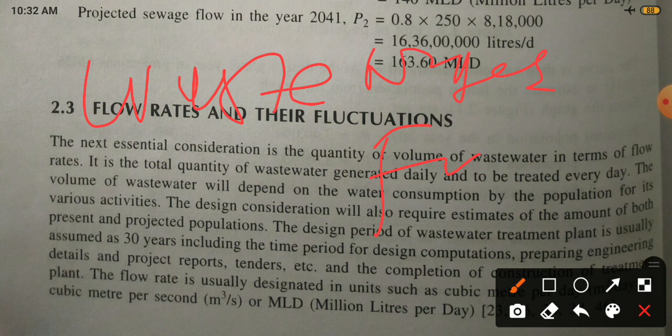Now we start the flow rate and fluctuation part. The next essential consideration is the quantity or volume of waste water in terms of flow.

Some flow rate, it is the total quantity of waste water generated daily and to be treated every day. What is said is that the essential consideration is simply the quantity or volume. This is the main word - the quantity of volume of waste water in terms of flow, some flow rate.

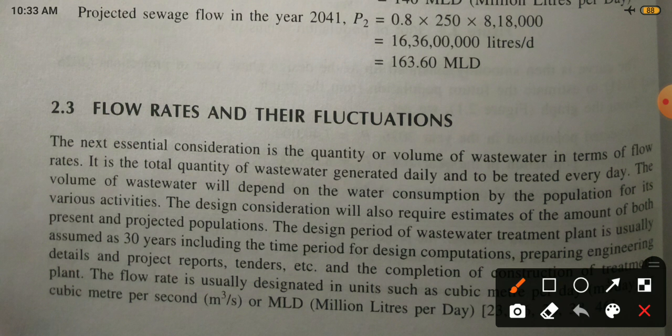That is, simply there are three types of flow: laminar flow, turbulent flow, and transition flow. Laminar flow is a straight line, turbulent flow is a wave line, and transition flow is a dotted line. These are the types of flow.

Now, the volume of waste water will depend on the water consumption by the population for its various activities. And the design consideration will also require an estimate of the amount of both present and projected population. The design period of waste water treatment plant is usually assumed as 30 years.

A 30 year planning period, including the time period for design computations, preparing engineering details and project report, tenders etc., and the completion of construction of the treatment plant.

The flow rate is usually designated in units such as cubic meter per day, that is meter cube per day, or cubic meter per second, meter cube per second, or million liters per day. Simply, on the basis of flow, which is the essential consideration, flow rate is dependent on quantity and volume.

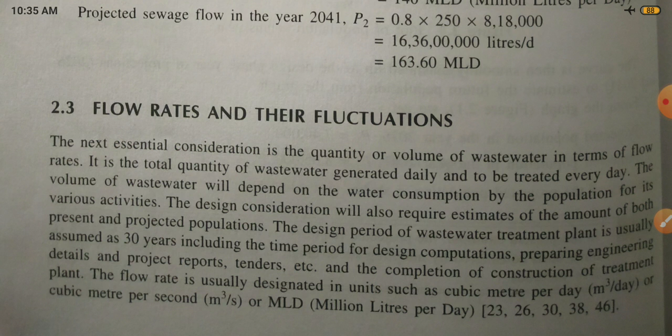The flow of wastewater generated from a community, town or city is never constant and uniform. The variations that are significant to the design of the treatment plant are briefly described under this point.

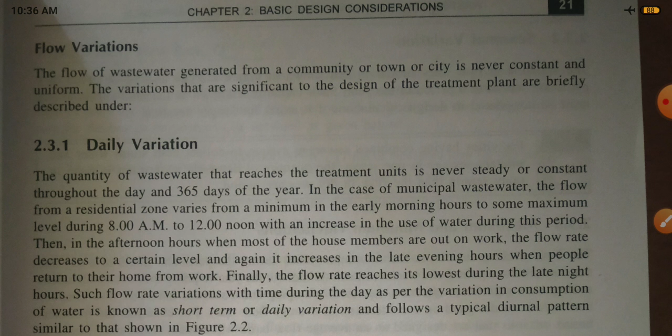We will look at the quantity of wastewater, that is, the daily variation. The quantity of wastewater that reaches the treatment unit is never steady or constant throughout the day and throughout the 365 days of the year.

In the case of municipal wastewater, the flow from a residential zone varies from a minimum in the early morning hours to a maximum level during 8 a.m. to 12 noon, with an increase in the use of water during this period.

Then in the afternoon hours, when most house members are out at work, the flow rate decreases to a certain level, and again it increases in the late evening hours when people return home from work. Finally, the flow rate reaches its lowest during the late night. Such flow rate variations with time during the day, as per the variations in consumption of water, are known as short term or daily variation flow.

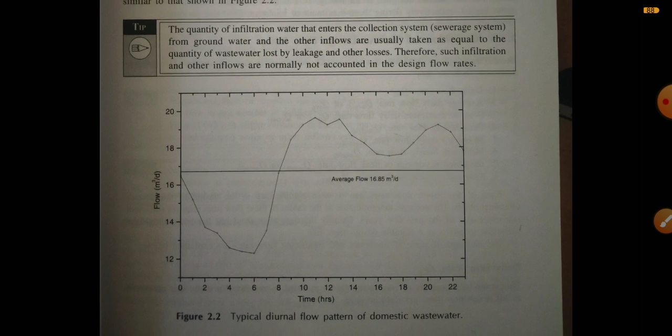This is shown in a typical pattern similar to figure 2.2, so let's draw it - the typical diurnal flow pattern of domestic wastewater.

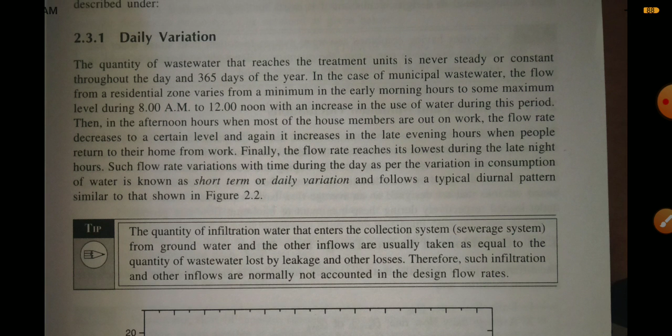Simply the average flow rate of 16.85 meter cube per day is a daily variation. The quantity of infiltration water that enters the collection system or sewerage system from groundwater and other inflows are usually taken as equal to the quantity of wastewater lost by leakage and other losses. Therefore such infiltrations and other inflows are normally not accounted in the design flow rate.

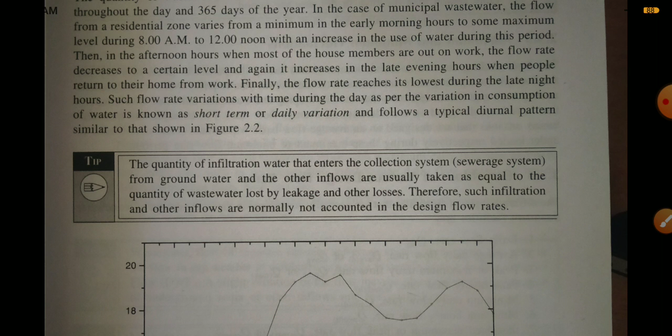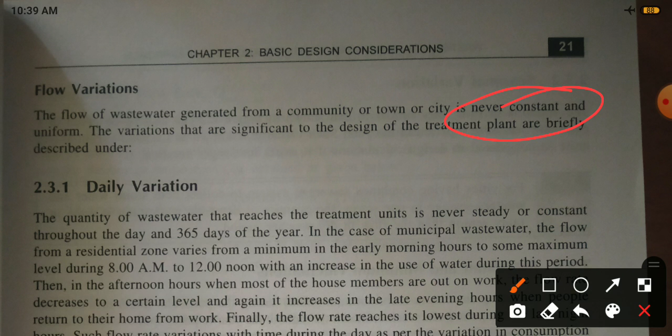The flow of wastewater generated from the community, town or city is never constant and uniform. The variations that are significant to the design of the treatment plant are briefly described under this consideration, including daily variations, as discussed with the main graphical system.

The next essential consideration is the quantity or volume of wastewater in terms of flow rate. It is the total quantity of wastewater generated daily and to be treated every day. The volume of wastewater will depend on water consumption by the population for various activities. The design consideration will also require estimate of the amount of both present and projected population. The design period of a wastewater treatment plant is usually assumed as 30 years, including the time period.

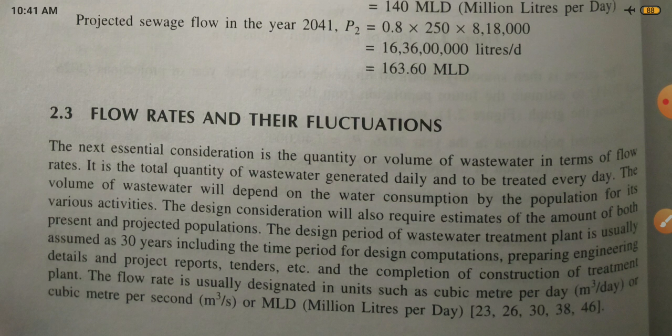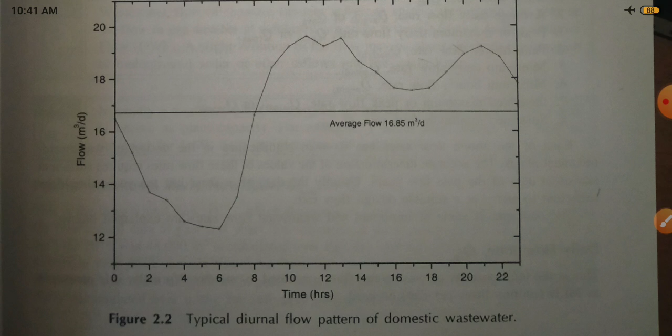Now the last point, which is seasonal variation. The variation in flow rate, similar to that shown in figure 2.2, shows different flow rates at different times. This can also be observed in a particular season or period of the year. Such variation is known as seasonal variation and must be considered in design calculation for the longer duration.

Now, for cities having a combined sewerage system to collect both storm water and sanitary sewage in one sewer, the quantity of domestic wastewater is more in a rainy season than the flow in a dry weather period.

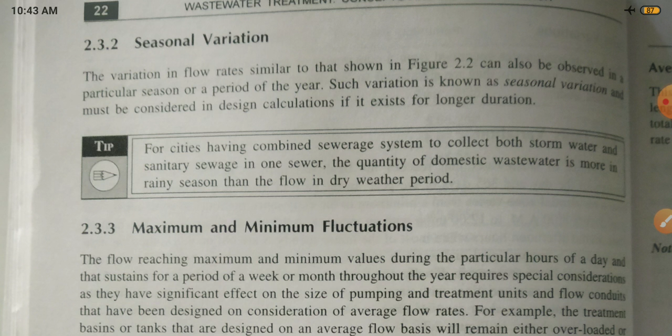Definitions of various design flow rates. The different types of flow rate normally considered in the design of wastewater treatment facilities are: first, daily flow rate Q_D; second, average daily flow rate Q_average; and the peak or maximum daily flow rate Q_peak or maximum.

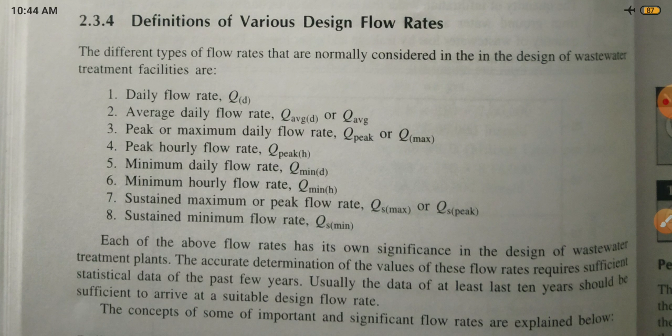Peak hourly flow rate Q_peak, and the minimum daily flow rate, minimum hourly flow rate, and sustained maximum or peak flow rate Q_sustained. We will look at the definitions of these various flow rates one by one in detail in the next lecture.